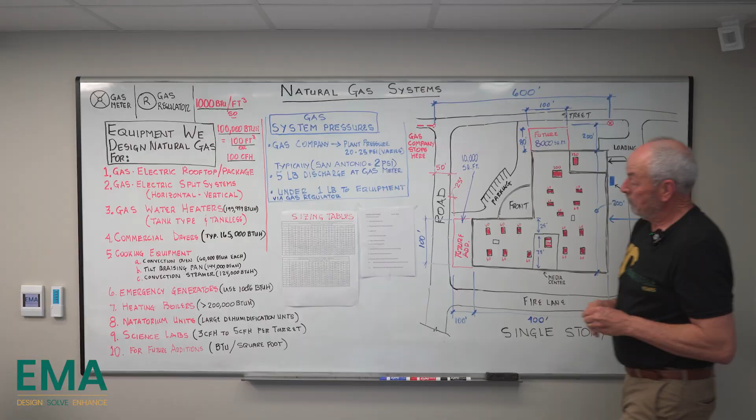Let's look at the first item, total connected gas load. We're going to be looking at 500 CFH for cooking, 200 CFH for the water heater for the kitchen. This is probably an elementary school because there's no athletic area, no shops, so I kept it simple.

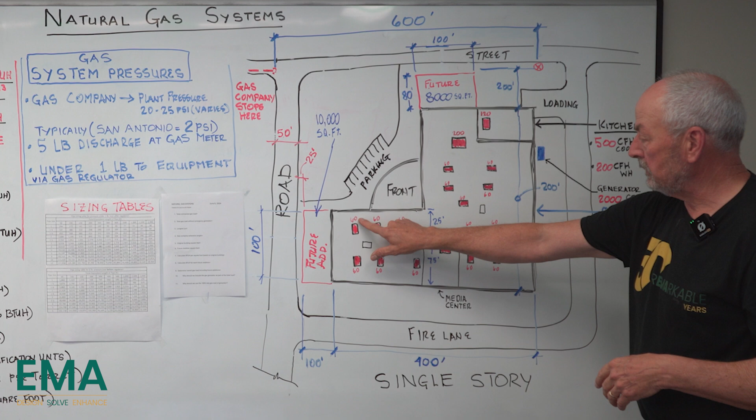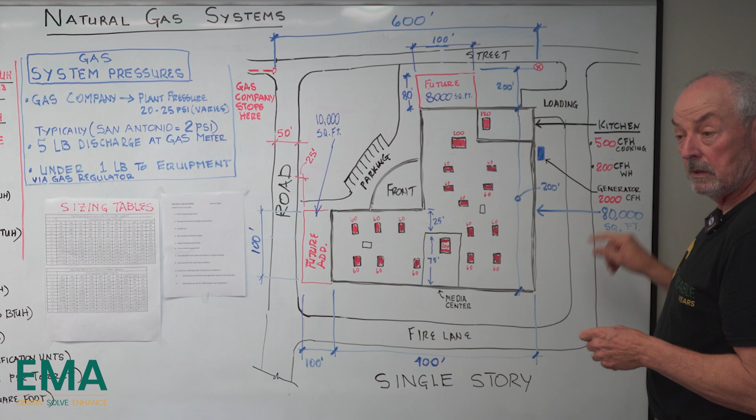We've got rooftops, so we want to add up all these: 60 CFH, 200 CFH, 120 CFH, 200 CFH, and come up with a total CFH. Let's do that. Can y'all do that?

I think it's 15, there's 15 at 60. I did it earlier, so that's 900 plus 200, plus 200 plus 120, that's 1420. And then add in the cooking, that's 500 plus 200 for the water heater at the kitchen.

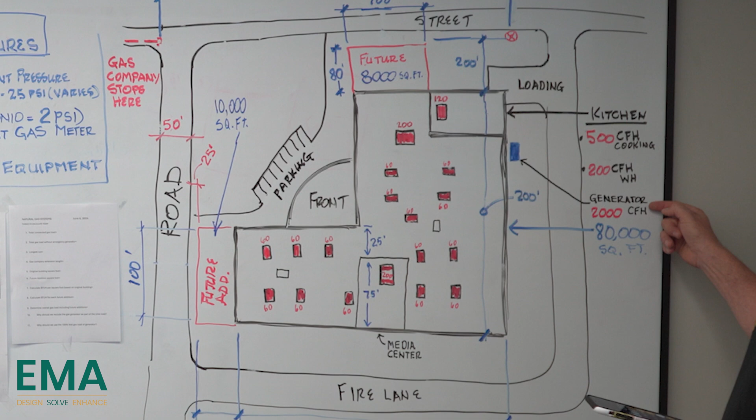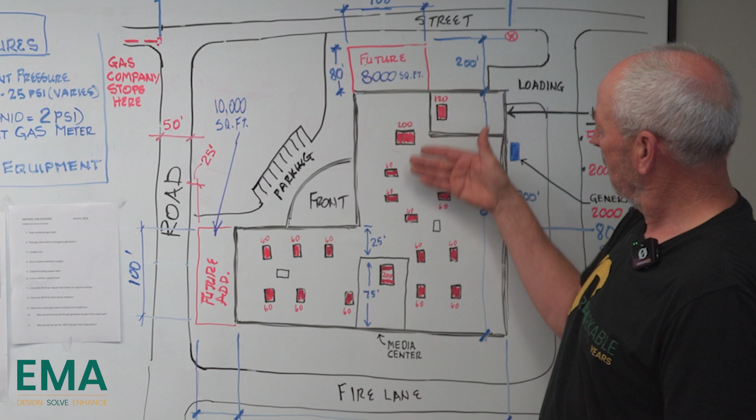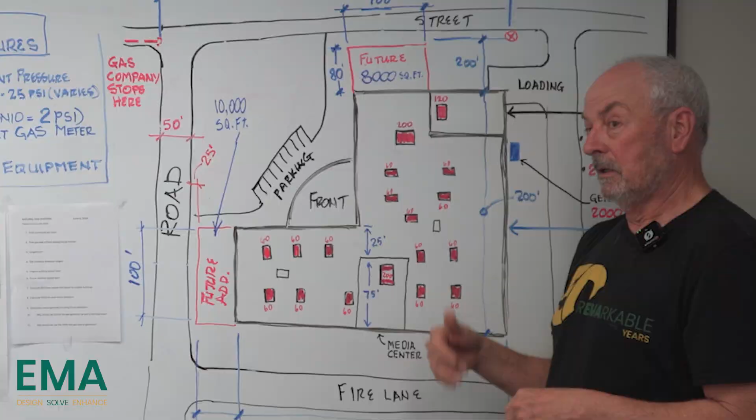Oh wait a minute, generator. They come on when the power's out, right? So do we need to include that in the total? The building's down, why would we include the generator? You say yes, because it still needs to be supplied either way. Because they have to test it periodically, and they may be testing it when it's cold outside, we're using a lot of gas, and it's during lunch hour. So yeah, we're going to add that in for the total.

2,000, and what else? Was there anything else? So we have our rooftop units, got our cooking, gas water heater, generator, and I come up with 4,120? 4,120, yes sir, okay cool.

So that's 4,120 CFH, which is also 4,120,000 BTUH, right? Okay so it's 4,000, and I'm just going to leave it at CFH. And then the total gas without the generator is 2,120.

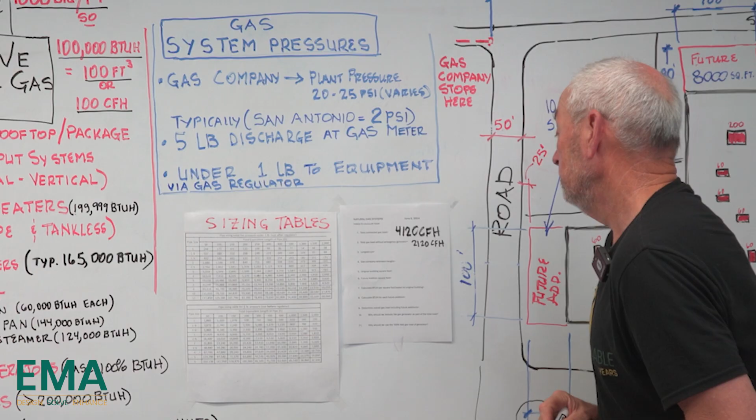Longest run. So if the gas meter's here, we've got 200 feet to the building. So let's add that up. You got 200 feet. Prerequisite is calculator, everybody needs to have a calculator.

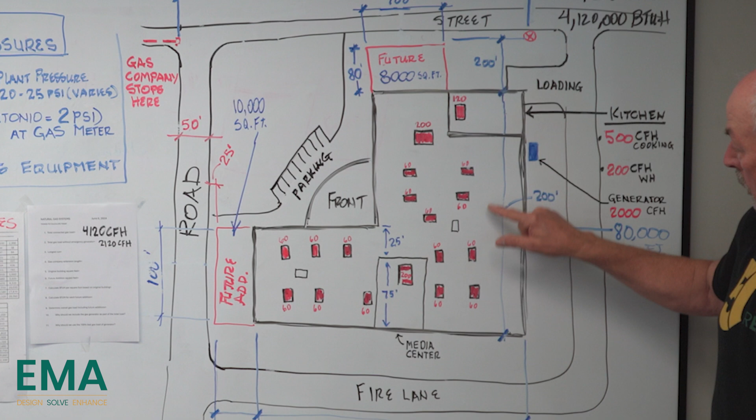And this does not have to be precise, we just need to be close. In other words, we're 200 to here, and then it's 200 to there. And I drew this in on purpose, so if we're going to probably run our gas line right through here on the roof, we could say 125 from there to there, that's another 125 plus. So that gets us to here.

And then we're another 400, and I'm going to go ahead and say 500 because we're going to allow for the future addition. So plus 500.

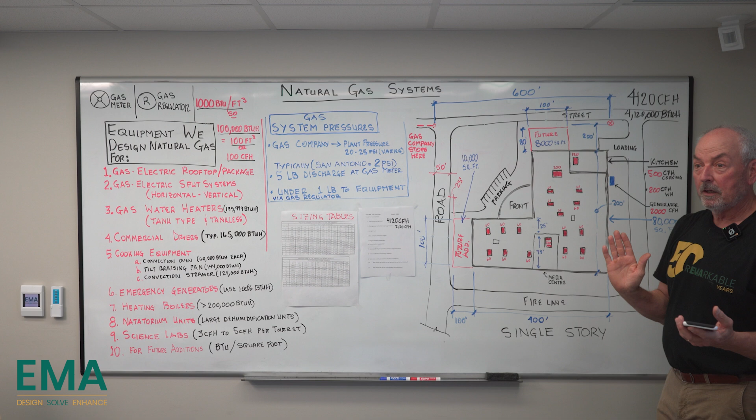What about vertical? Is horizontal all we have to worry about? Does gas care if it's horizontal or vertical? No, it's still pressure drop, right? So let's go ahead and add in another 25 feet because we're below ground coming up to the roof. Let's make it 20 feet.

845, is that what y'all have? I'm at, okay, 845, and that gets us all the way to the furthest future addition. This is very close to the gas meter, so.

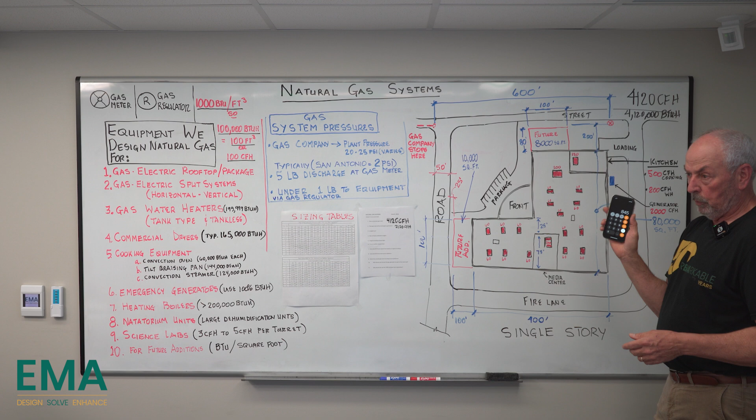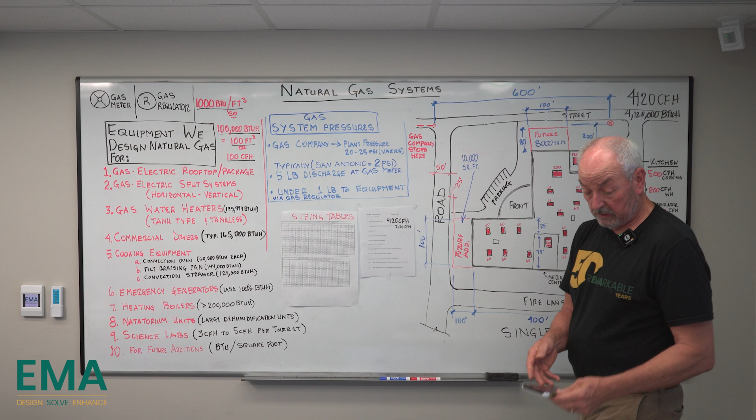And then what do we do in domestic cold water when we have to adjust for fittings, valves? We multiply times 1.5, and it applies here as well. So 845 times, 845 times, 1,267 feet. That's our longest run, 1,267.

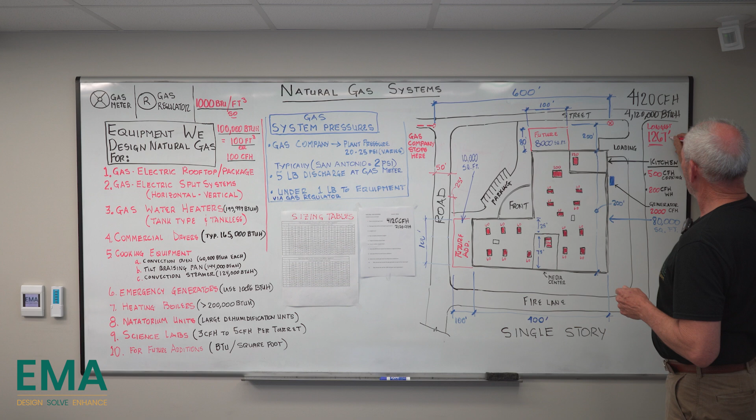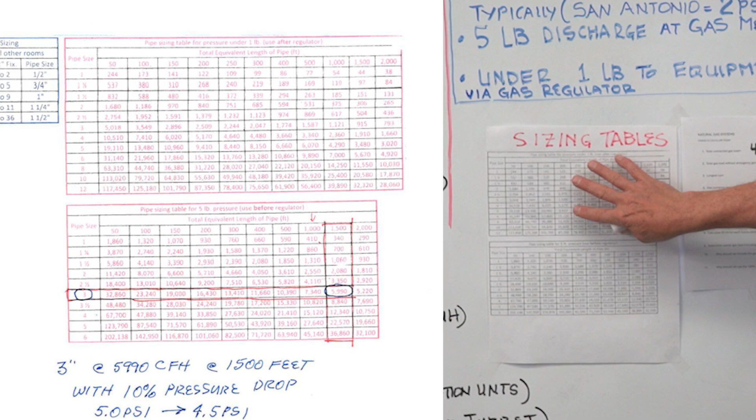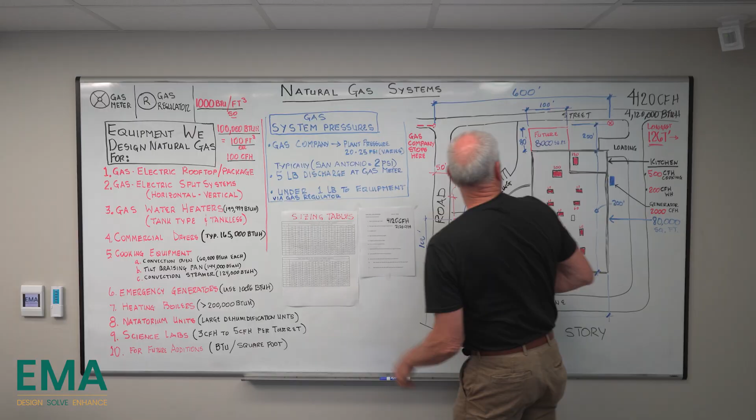So would you say we'd round up or round down? Round up. So this table, everyone, and Jordan, I need to get you a copy of the laminates. So we're looking at the line that we're dealing with, the 5 pounds, so it's medium pressure, and so it's going to be this bottom table. And we're at 1267, so 1,500 feet is the column that we would use.

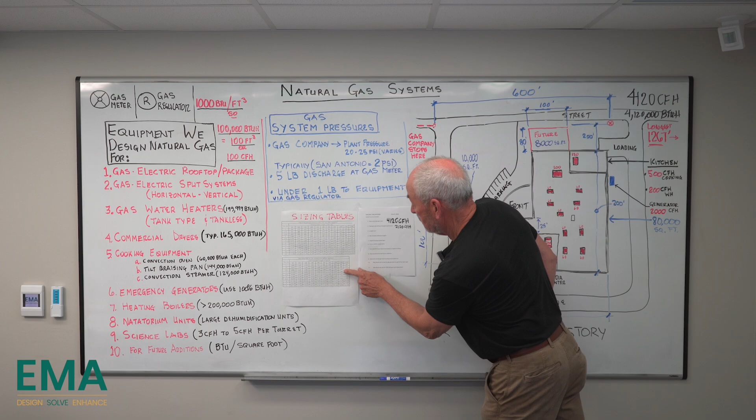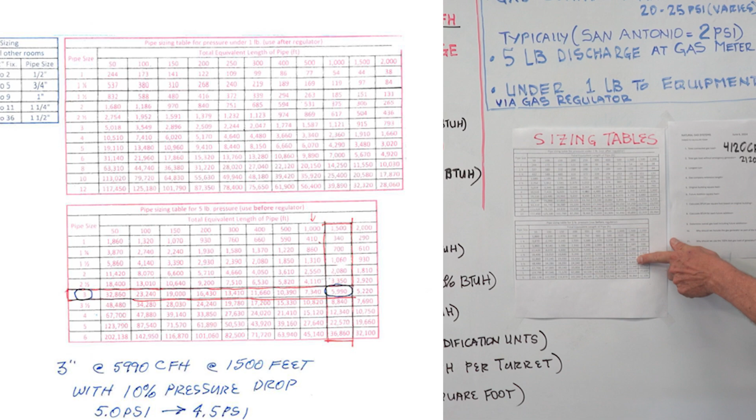And what was our gas load? 4120 CFH. 4120, 3-inch gas line, 1,500 feet, and it'll serve 5,990 CFH. So longest run was 1267, but we're going to use 1,500.

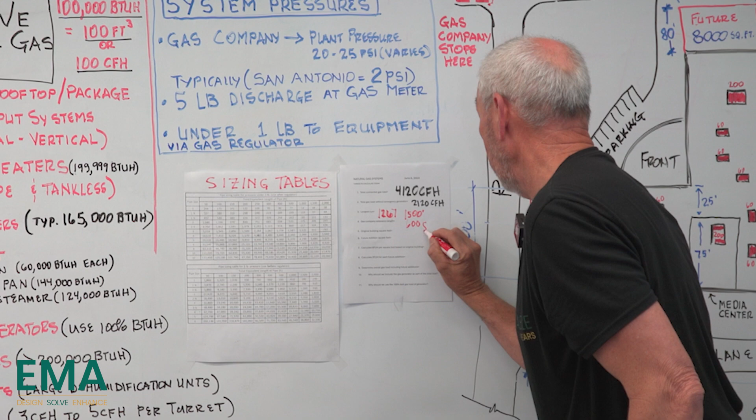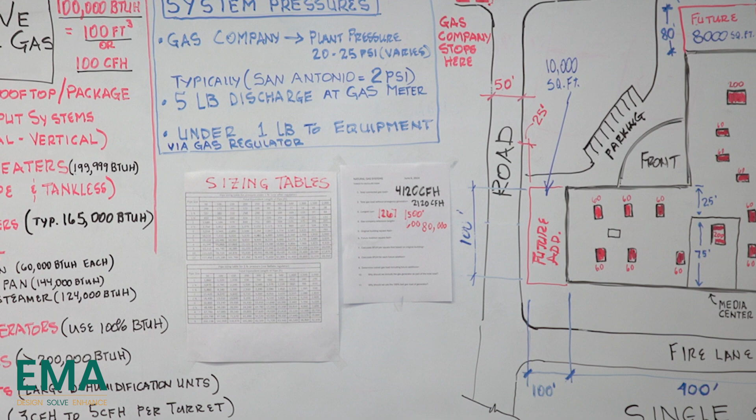Gas company extension length was 600. Original building square footage was what? 80,000? What's the future addition square footage? This one is 100 times 100, that's what, 10,000? Yes, so we're at 10,000 square feet here.

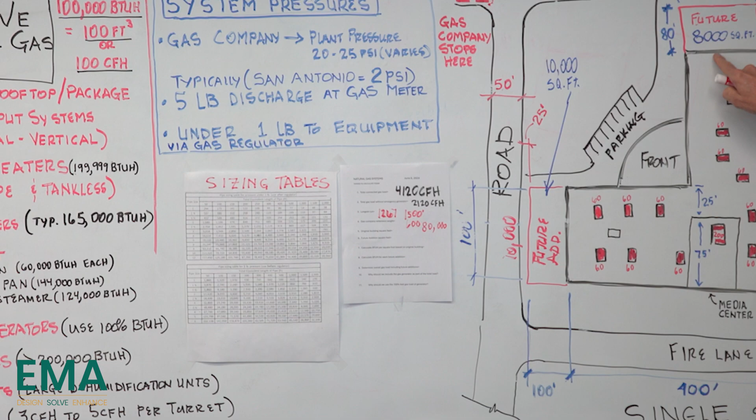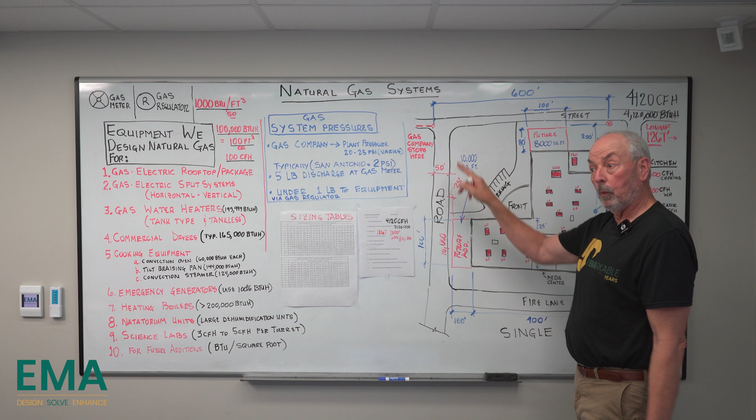And then this one's 8,000 square feet. Okay, so we've determined our longest run, gas company extension length is 600 feet here. We're going to use that number when we get the cost estimate back from the gas company. And then we say, well, we can divide that and calculate a cost per foot for future projects, if we want to compare costs from gas companies, kind of start a database. Original building square foot's 80,000, the future square foot was 10,000, 8,000, so we're at 18,000.

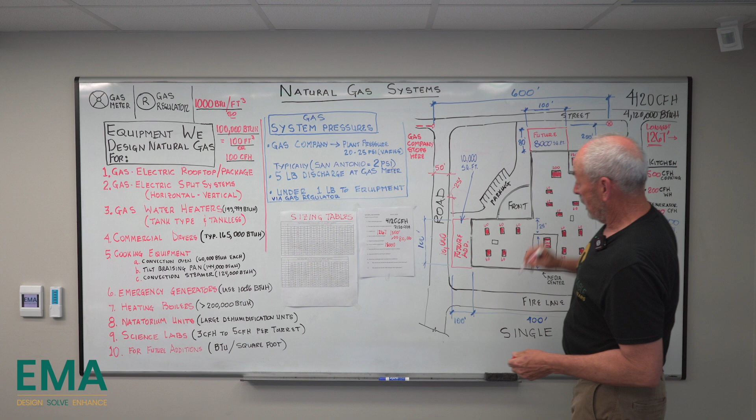And then we're going to calculate the BTUH per square foot based on the original building. So you got to make sure you convert it back to BTUH, otherwise it doesn't make sense. So we're at 4,120,000 for the 80,000 square feet, BTUH. And that comes out to what? 51.5 BTUH per square foot.

I'm just using a little box. So if we know what our future expansion is, then we just multiply 18,000 times that to coordinate with the gas company and let them know that. So the 18,000, what is 18,000 times 51.5 BTUH per square foot? 927,000. And the original was 4,120,000? I believe so, yes sir.

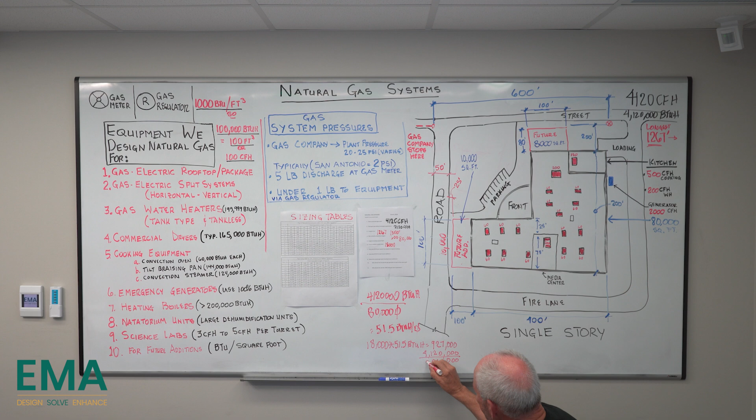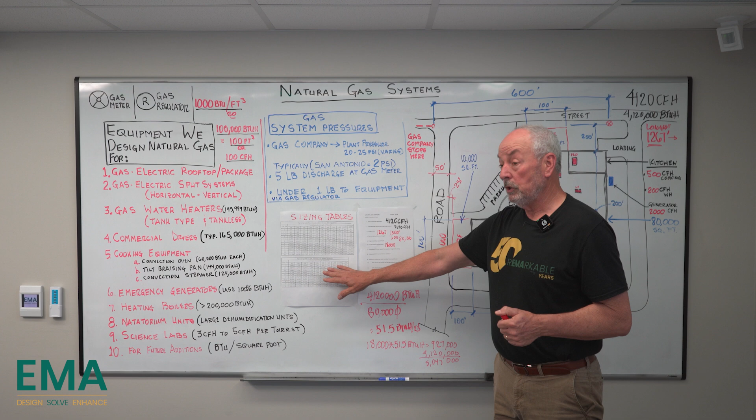Okay, so this is if you've got a good idea of the square footage. So now our new load is 5,047,000, and that covers the future expansions. And once we get into gas and you guys start sizing, I'll go over some other advantages of this table versus a higher pressure drop table that's in the NFPA that we use for existing buildings, because the higher pressure drop on existing buildings allows us to reuse smaller lines versus this.

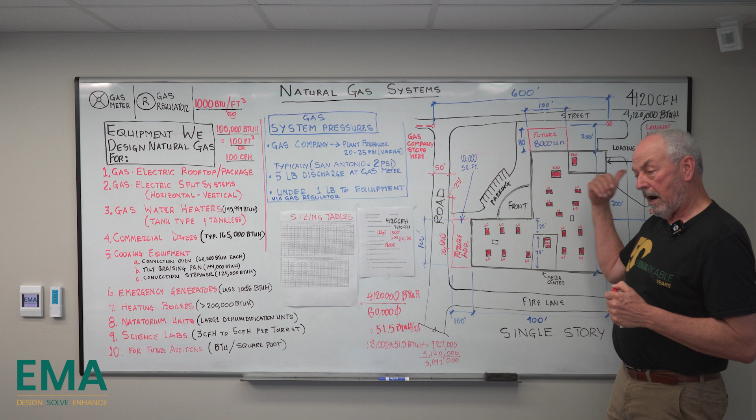This is only a 10% drop, y'all know what that means. If we're starting off at 5 PSI, then we're ending up at 4.5 PSI. So it's very conservative and it allows the owner room for expansion. So I mean, we could size it based on this and go back and look at the higher pressure drop table and see if we can cover these future expansions if they want to cut cost without, you know, maybe make the line size smaller.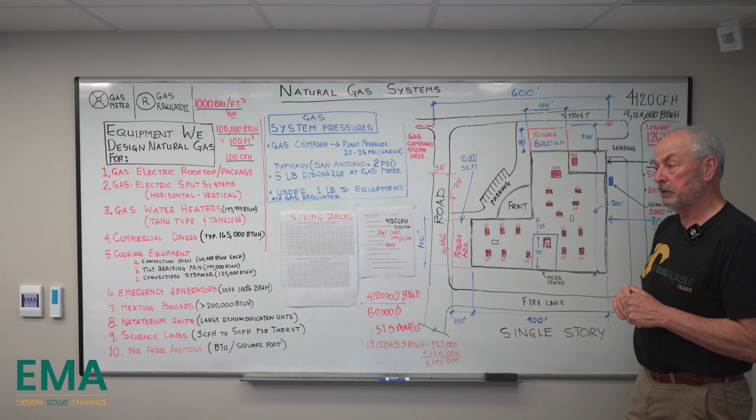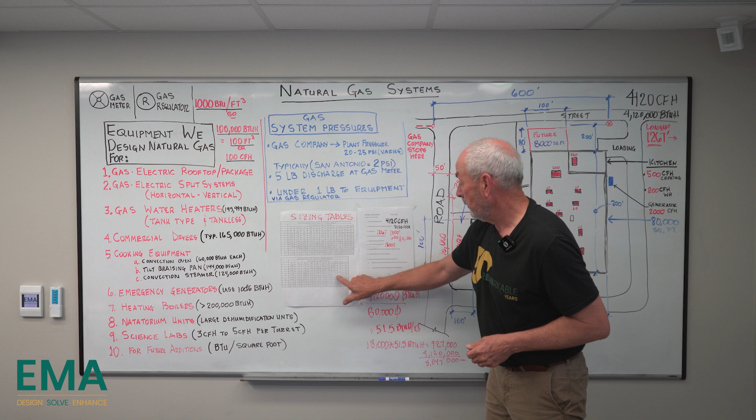So now let's do this. Now we got to go back and, well, we looked at that a while ago. 1,500 feet, 3-inch. Let's see, 1,500, say yeah, we're at 5,990. So we're still good on the future expansion with a 3-inch.